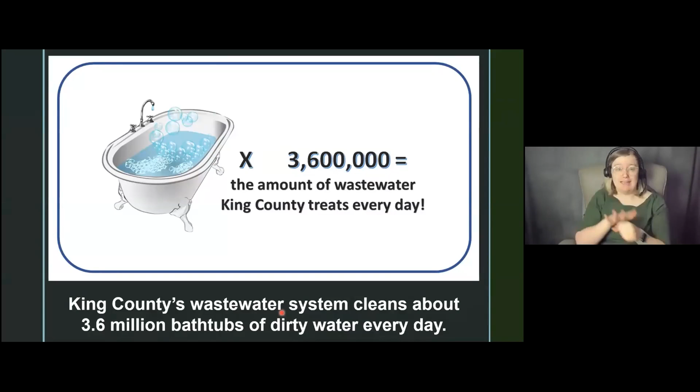We also operate two local treatment plants, at Carnation and on Vashon Island. Overall, we treat an average of about 180 million gallons a day, but that number can go much higher when it rains. It can be hard to imagine big numbers like 180 million gallons, so this might help: it's enough water to fill 3.6 million bathtubs every day, if you can imagine that many bathtubs.

Here is a picture of South Plant in Renton, where your wastewater gets treated. Because your city collects your wastewater, you may not have known that King County provides wastewater treatment. So the water that you use at home, school, or businesses, after it's used, travels through your small side sewer pipe and goes to the City of Bellevue sewer system.

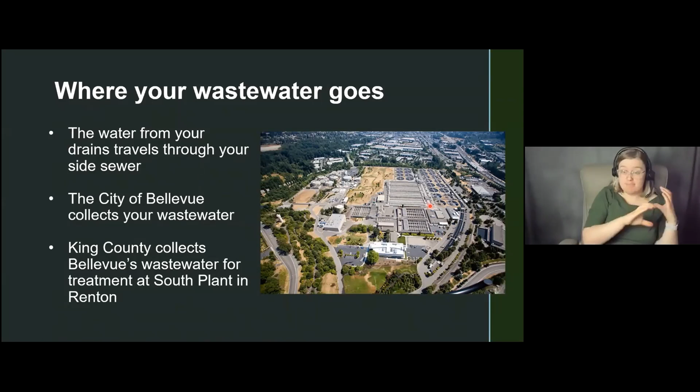Bellevue's sewer system is like a system of city streets, and King County's system is like a highway where all of the streets lead. It's the little pipes that lead to all the big pipes that the county manages. These highway pipes take the wastewater to the treatment plants around the region.

Now that you know who King County WTD is, I'm going to show you why we need to build this project.

Here you are looking at an aerial view of the Coal Creek natural area, where north is to the top. The northern part of the Coal Creek pipe runs along the banks of Coal Creek, crossing the stream in some places. The red line you can see here is the current pipeline, and this blue line is the creek, so you can see how they follow each other.

The Coal Creek trunk was built in the 1960s and 70s, during a 10-year construction effort to build a regional wastewater system. The Coal Creek trunk pipe runs all the way from Newcastle, south of this figure, up to I-405 here, and right before it empties into the Eastside Interceptor, which is like the highway that carries wastewater to South Plant in Renton.

You may be wondering why there's a pipe along a creek in a park. This is in part because this pipe was built a long time ago, before the park and the trail system existed. For the designers at the time, this was a sustainable thing to do, because the system was able to use gravity to collect wastewater at the low point of the ravine, which saved on equipment, energy, and labor costs.

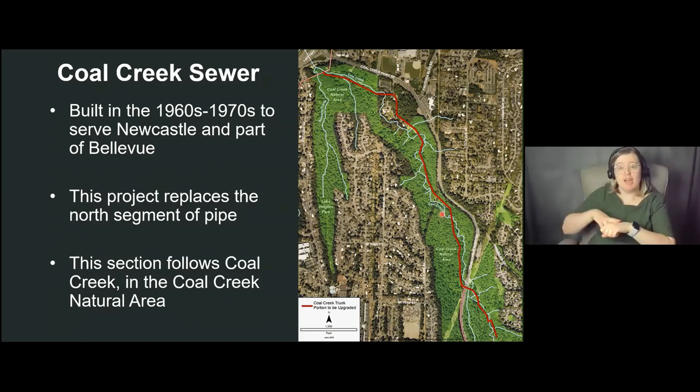This figure shows the population growth in the Bellevue area. There's been a lot of development in Bellevue, adding more houses and businesses that are sending flows to the sewer system. Bellevue's population really begins to climb in 1940 after the Lake Washington floating bridge opens, making Bellevue and Newcastle more accessible to Seattleites. Growth continues rapidly in the 1960s and is still climbing today.

King County needs to do this project because the pipe doesn't have enough capacity to support this growth into the future. At the county, we monitor both pipe flows and population growth, and we start projects like these when we see that the pipe might not be large enough in the future to meet the needs of the community. Right now, this part of the Coal Creek sewer doesn't have enough capacity to meet King County pipe size standards, and there's currently a 50% probability that the pipe could overflow to the creek in any given year, which is something we really don't want to happen.

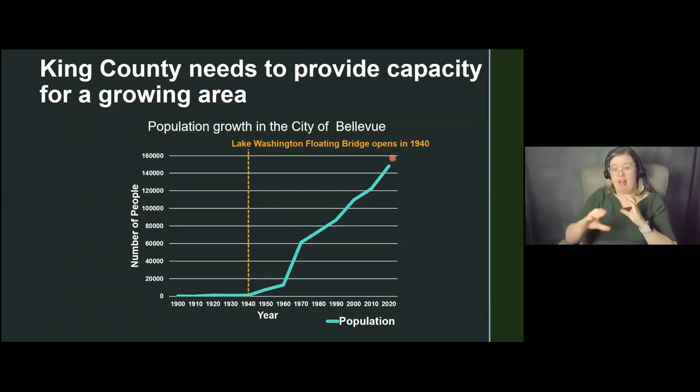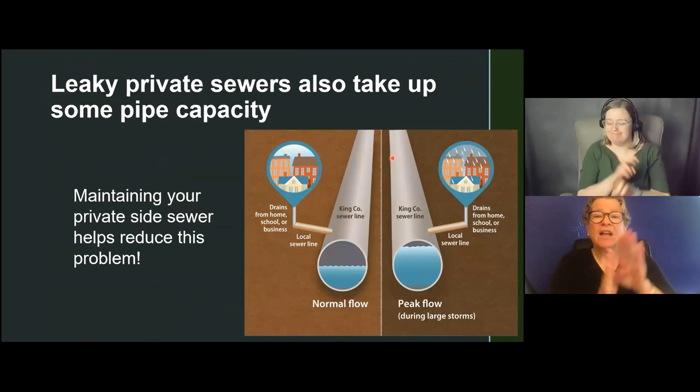But development isn't the only reason the pipes start to fill up. We also lose some pipe capacity to old pipes that develop leaks. What you can see here is what the pipes look like during dry weather flow, or normal flow, on the left side, and during large storms, or peak flow, on the right side. In both cases, the water that drains from homes, schools, and businesses travels down the side sewer to the local sewer to the pipe.

If the sewers were in perfect condition, we would have the same flow in dry weather and in big storms. However, if the pipes are not maintained well, they can get cracked and groundwater can seep into them, which then fills the pipe in large storms with water that is not actually wastewater.

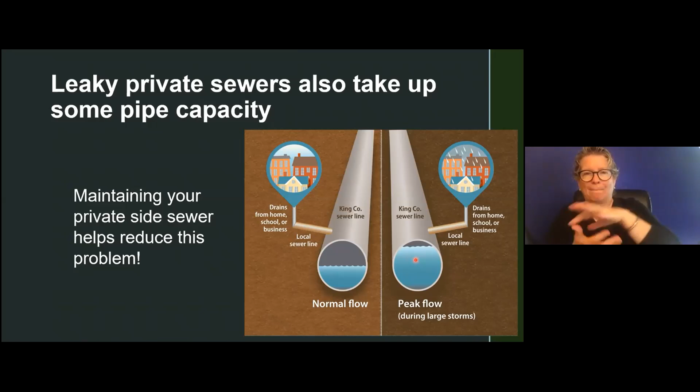Leaky sewers are not just taking up space in pipes. There's also additional cost to pump this clean water to a treatment plant and then treat it. So if you are a homeowner, you can really help save capacity in our pipes and control costs by periodically inspecting and maintaining your side sewer so that we can keep groundwater out of the pipes.

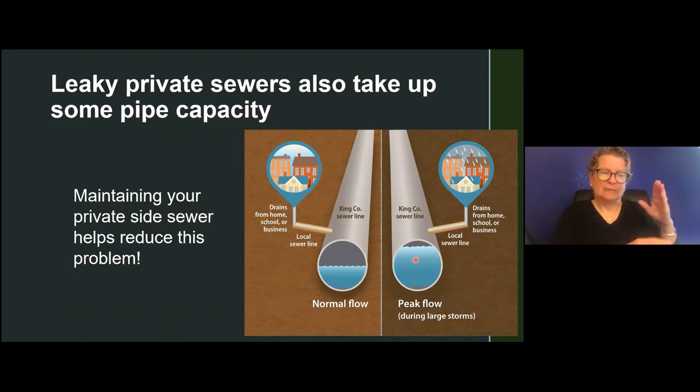Besides providing more capacity in the pipes, this project really gives us an opportunity to find a better location for the pipe and get it out of the natural area. Due to its unfortunate current location, we have had to carry out several projects to repair and stabilize the creek banks after large floods have exposed the pipe. So far, this has happened at least 4 times. In all those times, the pipe has stayed intact, but it is at risk every time the bank erodes.

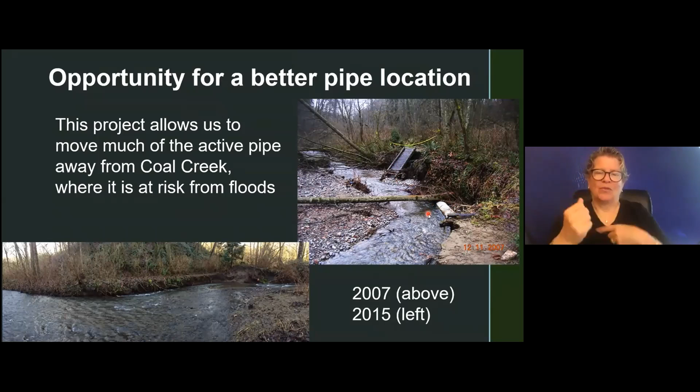Our team looked at this pipe upsizing as an opportunity to move the pipe away from the creek, protecting both the pipe and the creek. So this improved design will really help reduce long-term costs for our ratepayers.

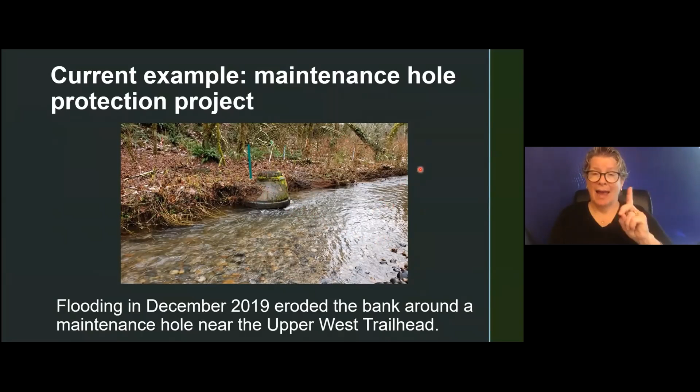The large rains and floods in the December 2019 event also filled the sediment pond by the Upper West Trailhead, which is just downstream of here, and many of you may have used that parking lot.

There's been enough erosion around this structure that we need to do a temporary project to protect the maintenance hole until the larger project is finished. This summer, we will be completing a project to shore up the bank.

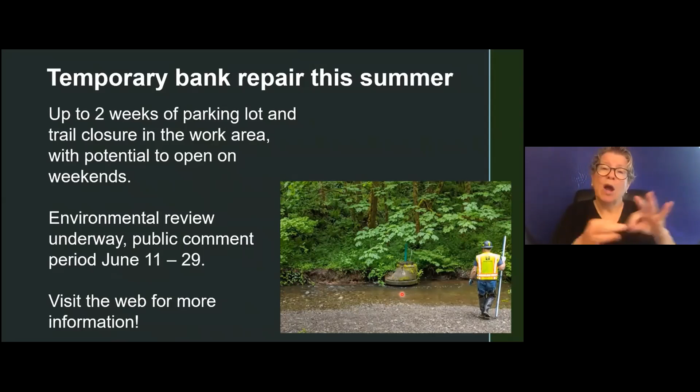This structure here and the pipe will eventually be removed when our new project is in place. This smaller project is in environmental review right now, and you have a chance to comment on the work if you'd like. You can find links on our project website to find and review the environmental documents and provide comments.

Because this project is located in a sensitive area, both the permitting and the environmental review for this project are very complex. Design will not be complete until after we receive all of the project permits.

This summer and fall of 2020, permitting and environmental review will be underway for the entire project. And we will let people know when you are able to comment.

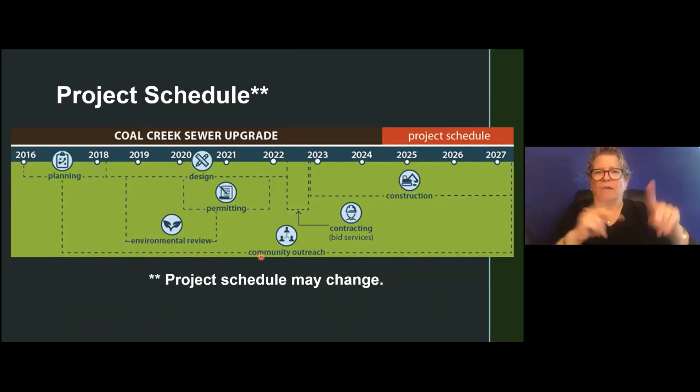Thanks, Liz. This is Ron Barg. I'm the project manager for the consultant team. I work with Brown and Caldwell, and I'm leading the design team to help design the project for King County.

8,000 feet of that will replace the North Coal Creek trunk sewer, and about 2,800 feet of pipe will connect the local system to the new pipe. The local system now connects to the existing pipe.

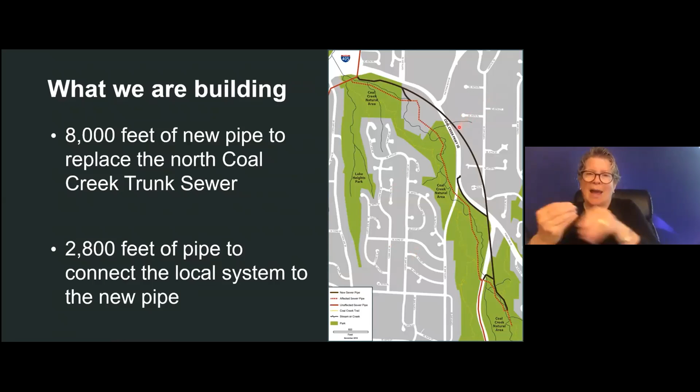We're moving the new pipe over quite a bit, so that requires a fair number of new connection pipes to go from one to the other.

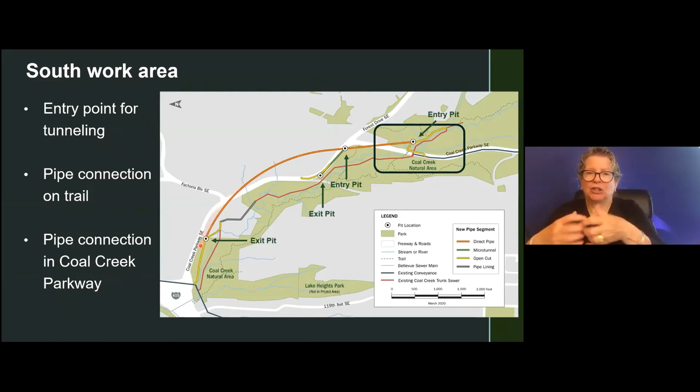This is where the entry pit is located and where the tunneling will start and where the tunnel boring machine will feed pipe into this new tunnel section that goes along here to the exit pit right here.

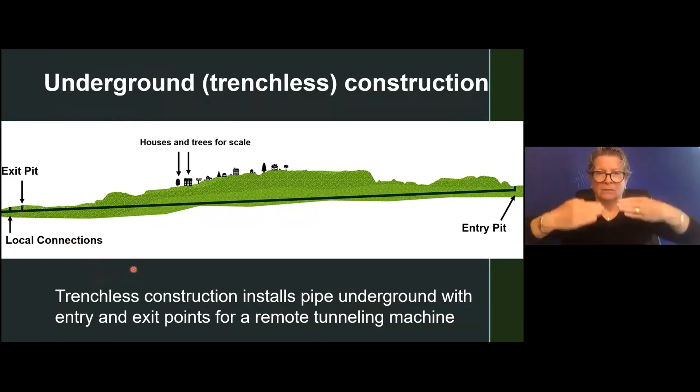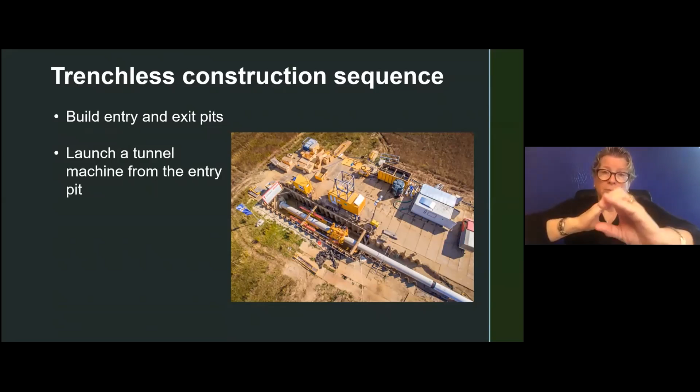The excavated material at the head of the tunnel boring machine removes the soil and carries it to the entry pit, where the soil and the drilling fluid are separated, and the drilling fluid is recycled. The excavated material is hauled off site.

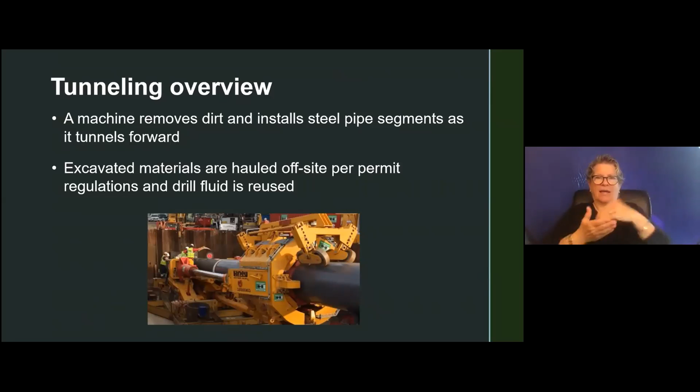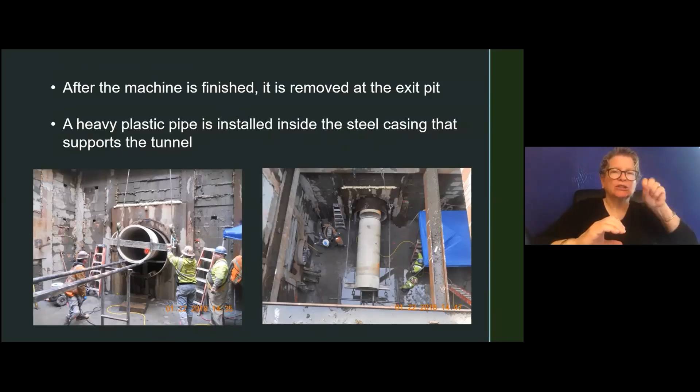So the north work area—this is where the exit pit is for the main trenchless component of the pipe. And this yellow line is open cut trenching to connect into the east side interceptor, which Liz mentioned earlier, and that goes to the south treatment plant.

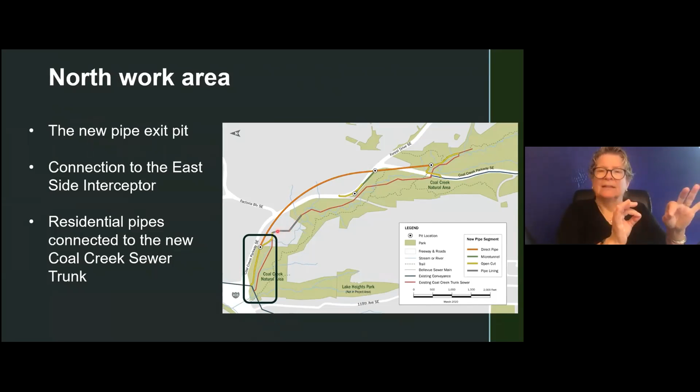There are some residential pipes that need to be reconnected along the Woodson condominium complex here and down along 125th Avenue, right where my laser pointer is going. Those are some individual connections—we'll be reconnecting those into our new pipeline located here.

There will also be—I'll come back to the south area now, into the natural area, and talk about the connections that will be done there. There are several City of Bellevue pipelines that come down the hill to connect into the existing pipeline all throughout this area. We'll be keeping those in place, but reconnecting them to the new pipeline.

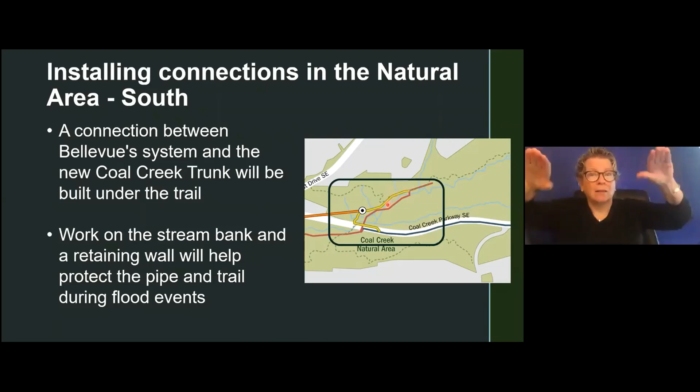This pipeline in yellow is, again, an open cut pipeline. It will be installed along the existing trail beyond the parking lot. There'll be some work in the creek bank along here to stabilize that, and also a retaining wall just uphill of the new open cut trench pipe to support the hillside and allow construction access through this narrow area.

So in the north area, the connections will be made by going through part of that area, including a wetland area, shown in these two photos. This is open cut trenching—the stuff you've seen alongside roadways. A contractor uses an excavator to dig a trench, puts steel sheets in to support the sides of the trench, puts a pipe at the bottom, and then backfills up to the finished grade.

In this particular case, you can see some of the protective measures used to protect this wetland area—these steel sheets. This is a little bit different than what we'll be using, but similar. Once we're done with construction, we'll take all that out and restore the wetland and do some enhancements.

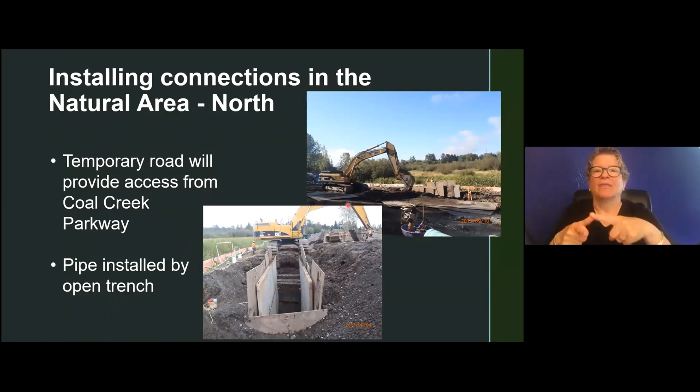So the construction duration—as Liz mentioned, the total duration for the project is 4 years. That's a long time, but we have a lot of pipeline to put in. The most extensive work is in the Upper West Trailhead area, which is expected to be closed for about 3 years. Tunneling itself will take 2 years, and some of the connection pipes up in that area take about another year.

Work that's done in the creek here and further south, there's 2 locations where you have work below the high water line in the creek. There are regulated timeframes for when that work can occur. In this particular area for these streams, that's in the summer, so all of that work will occur during the summer, and that does affect the schedule, how the schedule fits together, and it extends it a little bit in this particular case.

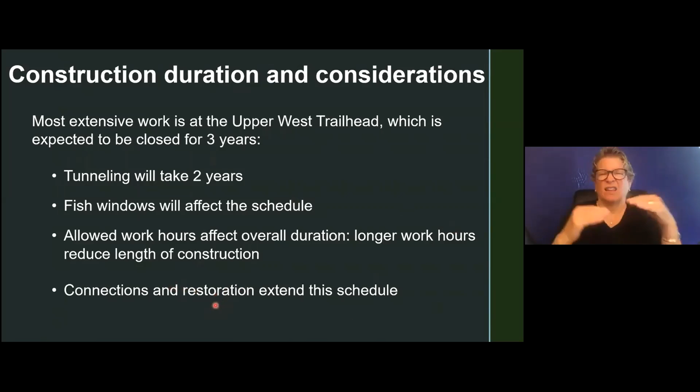Also, the work hours that we're allowed to use will affect the overall duration. Longer work hours mean the construction length is reduced. Also, the connections and the restoration extend the schedule, so all of that leads up to the 4-year activity that we were talking about earlier.

So some of the other impacts in the Upper West Trailhead: not only will the trailhead and part of the trail be closed for 3 years, but just south of the parking lot, there's a wide spot in the creek that was built and designed to capture sediment so that it doesn't impact downstream portions of the creek.

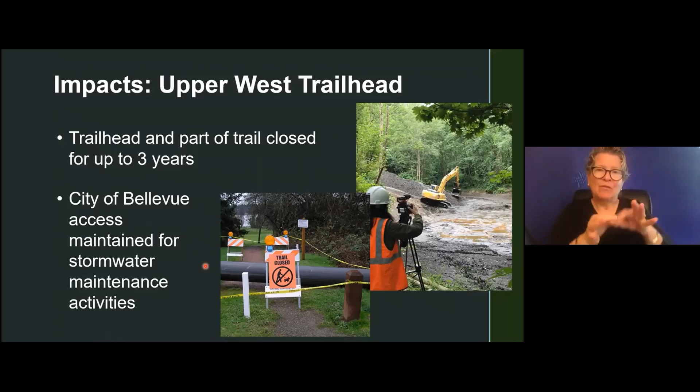The picture on the right shows City of Bellevue going in last year and removing that sediment. They do that every year. So even though our construction activities will take place in the same general area, we'll configure them such that we'll allow this important City of Bellevue activity to take place every year as well.

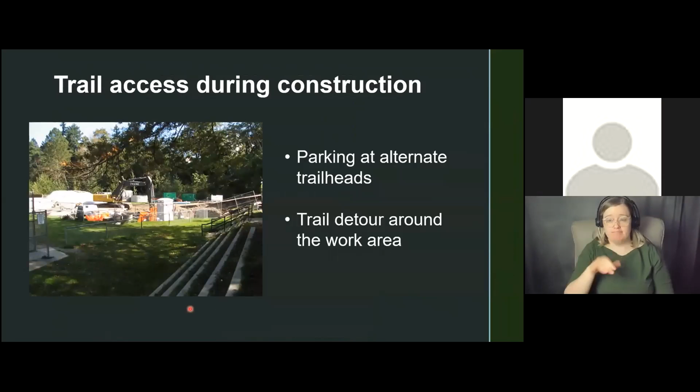So the trail access during construction will be restricted. We'll be closing the parking lot and the trail, but we will be providing an alternate detour trail. We'll be working with the City of Bellevue, using their well-kept program, to install a detour trailhead that bypasses the work area. Although the main parking lot will be closed, we'll be working with the City of Bellevue to identify alternate parking at trailheads to reduce the impact.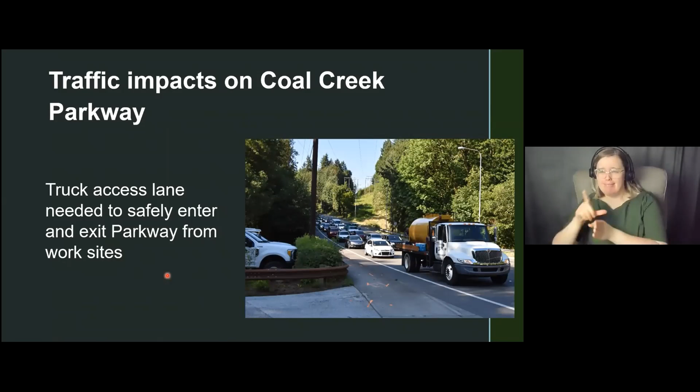We try to do most of it during non-rush hour periods. There will also, in addition to the construction in the roadway, be lane closures for truck entrance and exits and heavy equipment delivery and oversized load delivery, both here and at the north end. And there's also traffic impacts at the central section.

As I said before, this area here will actually have pipe installed in the roadway itself, so there'll be some lane closures when that occurs. And then the microtunneling pits require some grading work that will impact traffic as well. The microtunneling itself is underground and won't impact traffic.

Again, just to reiterate some of the stuff we talked about earlier on the south end at the parking lot, this yellow pipe is where we'll be connecting the City of Bellevue laterals, but this other yellow pipe connects the existing south Coal Creek trunk, which is here. It does not need to be upsized. We'll be connecting that and routing it over to our new pipeline. So some of this construction is in the street as well.

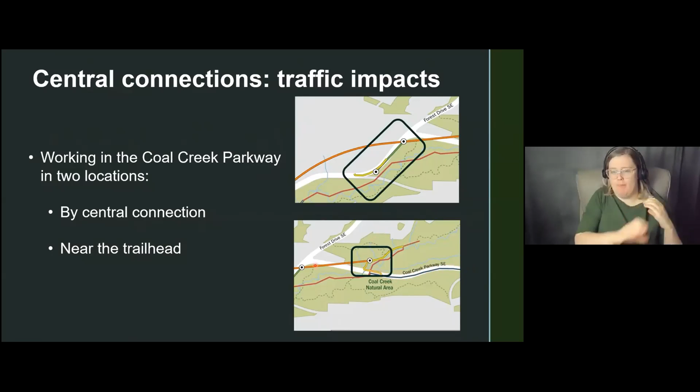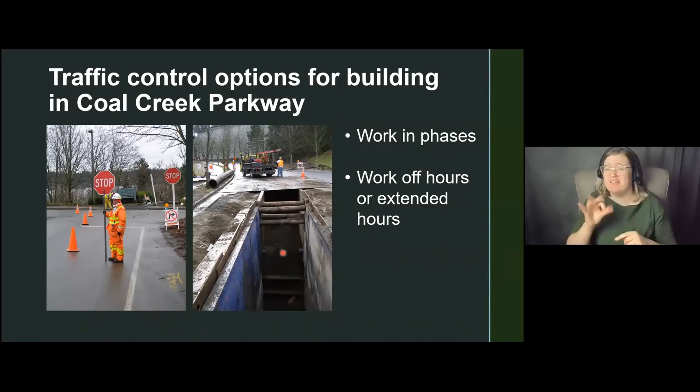So traffic control options for reducing the impacts to Coal Creek Parkway: we'll work in phases, and try to do work off hours or using extended hours to reduce the duration. The contractor will be developing a very detailed traffic control plan that he'll submit to the City of Bellevue based on the requirements of our specifications. We'll be conveying that information to you once construction starts, on what the impacts are and when they will occur. And if there's anything unexpected, we'll do broadcast alerts to let you know what to expect.

It's very important to us to protect the environment, and there'll be a number of construction controls in place for water quality, air quality, traffic impacts, and noise and light impacts. We'll be talking more about the impacts on the natural area at our June 23rd meeting, as Liz has mentioned.

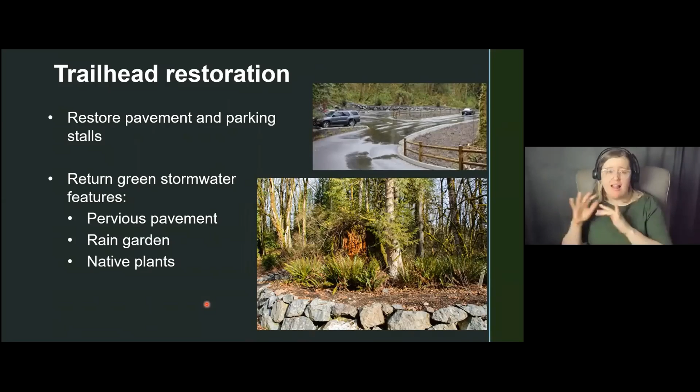So you've got pavement and parking stalls, and you've got a lot of really good green stormwater features here that are helping to protect Coal Creek. We've got pervious pavement at the entrance, there's a rain garden, there's native plant protection buffers so that the runoff from that parking area gets filtered before it gets to the creek. So this will all come back.

But it always feels when there's new stuff there and you're going to take it out like we've wasted something. And we don't do that. In King County, our Strategic Climate Action Plan has pretty rigorous goals for what we are supposed to accomplish, including diverting construction waste from landfills. So our staff wants us to reduce our landfill waste, and they literally want us to divert 85% of usable materials or recyclable materials somewhere else.

There are actually a lot of really great native plants there. You have a lot of good wildlife in the area, great birds and bees, and those native plants are hosting a lot of wildlife. They can actually be used in people's yards. So we talked to the city of Bellevue about whether they would want the plants, and they said no, but if you can host community plant salvages so people can take them home, that would be great. So that's another plan we have. We'll do this during the wet season when the plants will transplant better, but it's a way for us to reuse materials locally instead of just composting them and basically throwing them in the trash.

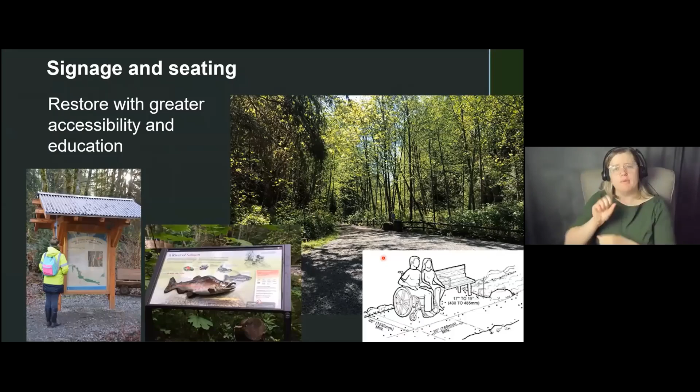We talked about impacting forests and streams. We will be, and I just want to be frank about that. We will need to take trees down. We will be affecting vegetation and doing in-stream work.

This is important enough to the community that we're having an entire separate meeting on June 23rd to talk about that. Our environmental planner, Jacob Shepard, will be talking you through how we're going to protect the creek during construction and the environment in general, and then what restoration is going to look like and the concepts of restoration. Jacob will be going through that on the 23rd.

Now I'm going to switch gears and talk about outreach. It's really a difficult time to be working with our communities, obviously, because King County usually puts a premium on public outreach and in-person public outreach. So we go to farmers markets, we host events. I've literally had living room and kitchen meetings with people.

We're on your streets. We try to really meet one-on-one with people, have conversations, and spend time walking people through things. We had great plans until the COVID situation hit. Right now, we can't do that.

However, we will have public comment periods on permits, and we will have environmental review coming up. We're really looking for meaningful ways to continue interacting with you, to get your questions answered, and to make sure you have the information you need to participate until we can actually meet in person, take you for a walk down the trail, and talk through the project like we would normally have done.

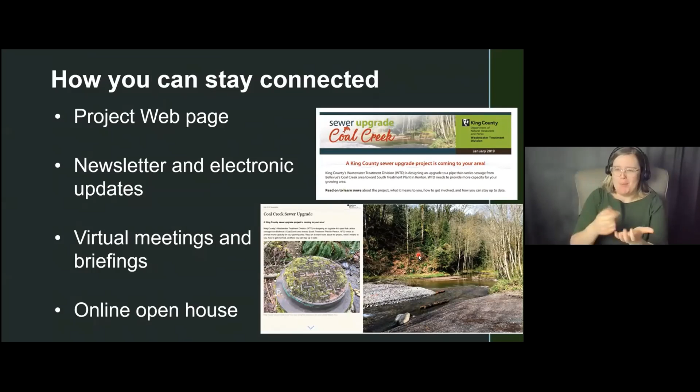If you can't find anything online, call me and we will get you the information you need. We also recognize people sometimes just want to get hard copies in the mail. Call me up, we'll get things in the mail for you. We really want to make sure you're getting the information you need however you need it. So definitely help us out. We'll give you a post-meeting survey, and then contact us.

The other thing we want to offer, and we've already been doing this for some Bellevue community members, is if it's easier for you to discuss the project in depth through a language interpreter, we are happy to provide that service. It's hard enough, even if I'm speaking English and you're speaking English, to really cover some of these issues in depth. So we would like to offer that service. We can also offer American Sign Language, which we have in this meeting today. We want to make sure you're using the language that works best for you for us to discuss the project. But definitely help us by filling out that survey.

I know everybody hates surveys, I'm not fond of them myself, but this does help us give you better service. And we have a second meeting, so you have a chance to give us some input before the next meeting so that we can take your input and utilize it next time.

Again, we've got the website that's up. It's got my contact information. All of our documentation goes onto this website. There is a library, we have a translation page where everything that we translated is present. So you'll find all these materials. They will stay for the life of the project and be available afterwards, so you can always follow the history. If you've missed anything, it is on the web. If you have any difficulty navigating, email or call me and I will help you get through that.

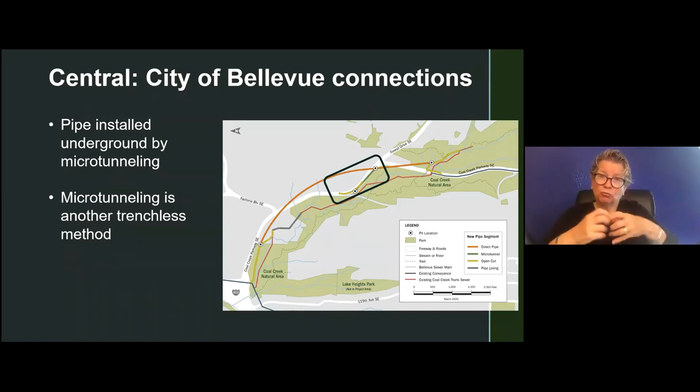I think you're talking about the main part of the tunnel. There's a shorter piece that's micro-tunneling. There, the casing size is still 48-inch diameter, but the inside pipe is only 12-inch diameter. The reason for that disparity is that in order to get a tunnel boring machine powerful enough, we need a 48-inch diameter casing, even though the inside is only 12-inch diameter. So that's it for that one.

Great, thank you Ron. Betty had one quick follow-up question for you. I don't know if you know the answer to this yet, but is there a particular street location for the City of Bellevue sewer laterals to the east of Coal Creek Parkway? The map we have isn't quite specific enough, so we can certainly follow up later if needed.

I think we need to follow up later. I don't remember. There is no street right there along Coal Creek Parkway. There's a hillside, and then there are streets up on top, a number of cul-de-sacs up there, and we can tell you specifically which one of those streets it is. But since it doesn't come down and connect into Coal Creek Parkway there, I don't know that off the top of my head.

Okay, no problem. Thank you, Ron. We'll definitely make sure that we get that answered later.

So we have one last question, just give me one moment. I think we have a question about the pond, sediments in the pond, but we may need to answer that later just to get a few more specifics. Monica, does that sound right? We'll answer this after the meeting. Jacob indicated he could address it. Okay, great. Jacob, do you want to take it away?